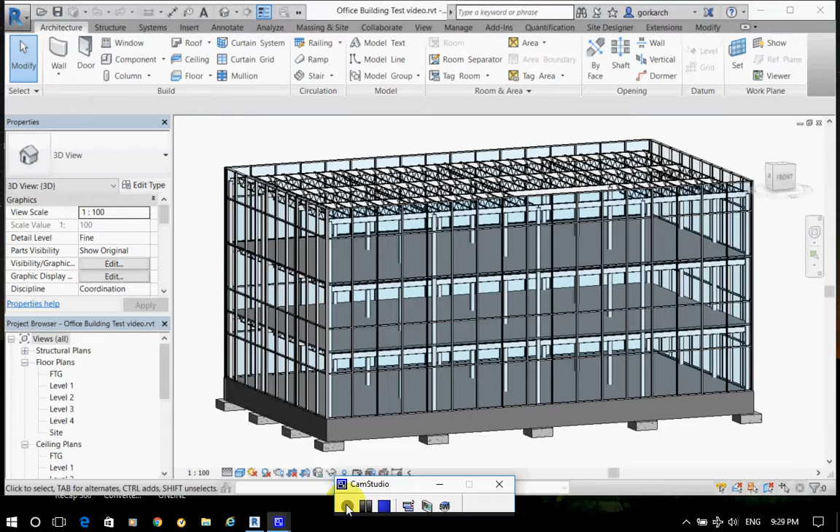Okay, so what we're going to do is an additional exit in the corner, and we have to create the roof plus some partitions inside. First thing I'm going to do is create two additional datums, horizontal datums.

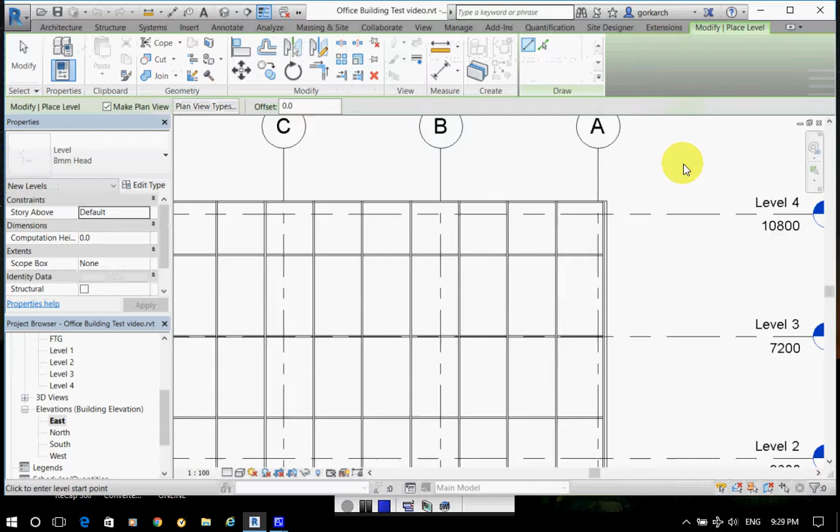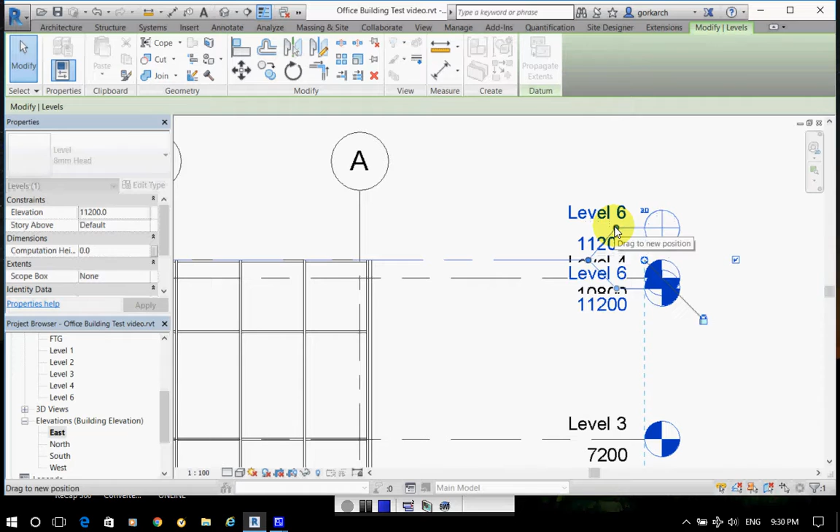I'll go to one of the elevations and create a datum with a floor plan view, level, snap on the top, escape. I'd like to make sure that 3D extents correspond in that scale. I'd like to break it and pull it apart so I can read the text. Rename it to parapet.

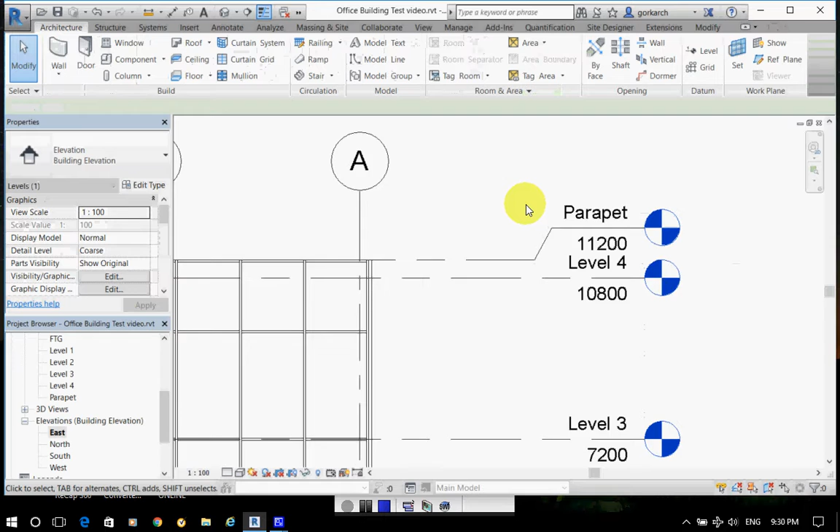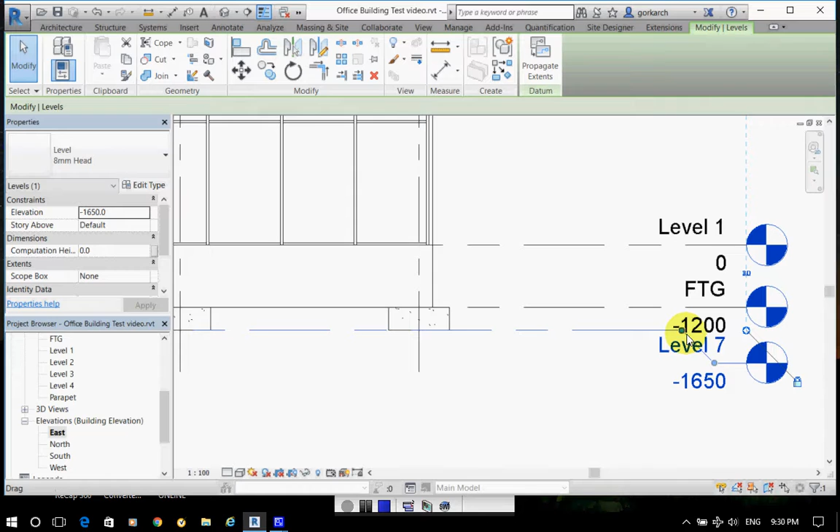Second datum, just for reference, will be underside of footings. This one I'll create differently, I'll copy it, escape. Rename it underside footings. As you can see, this one does not have a corresponding floor plan view.

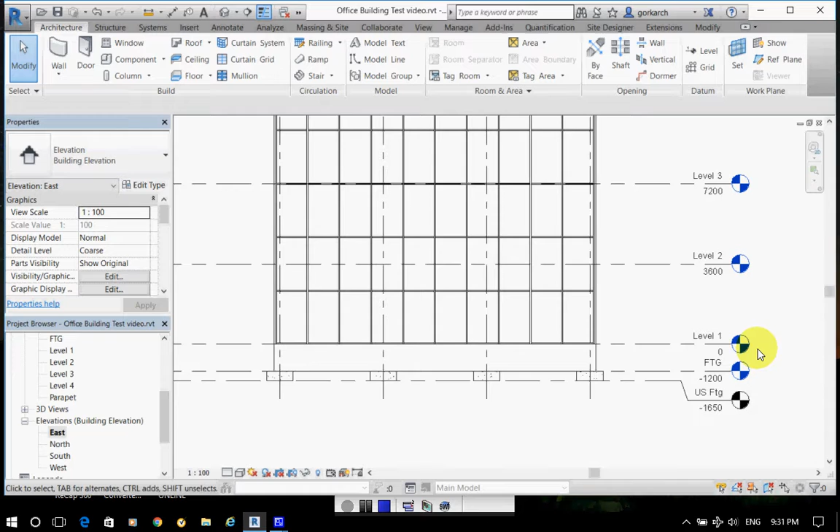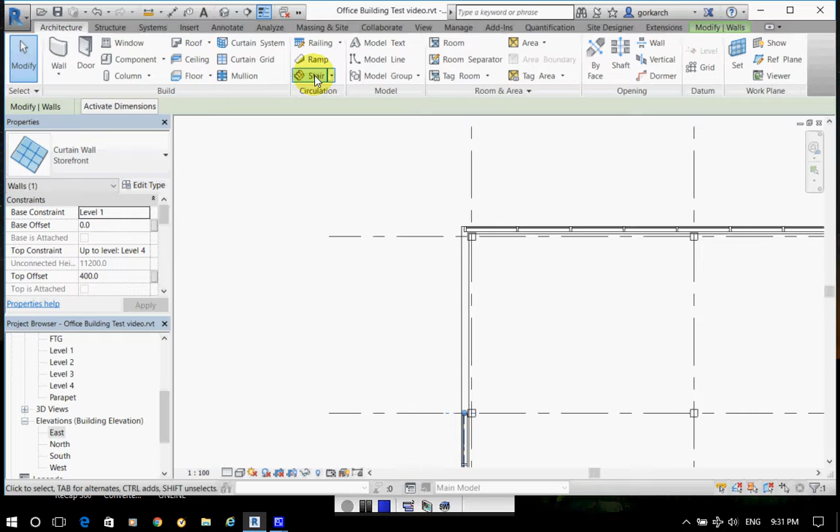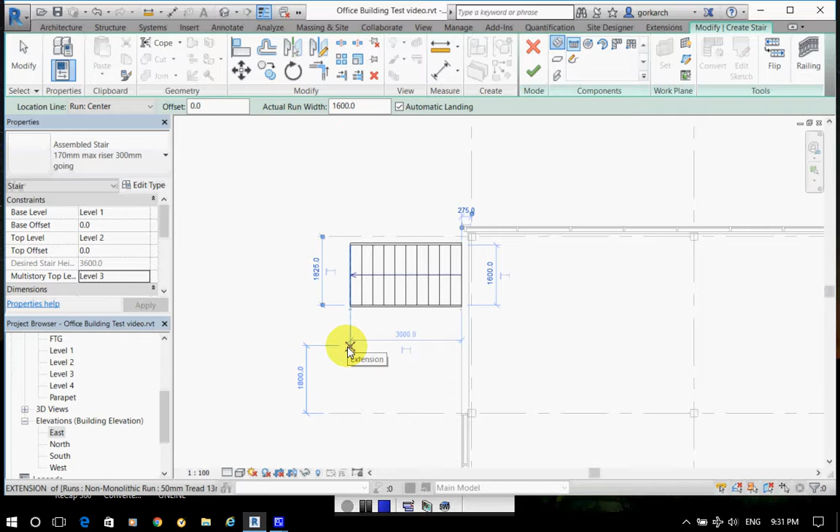1 created, landing, 2 created, finish.

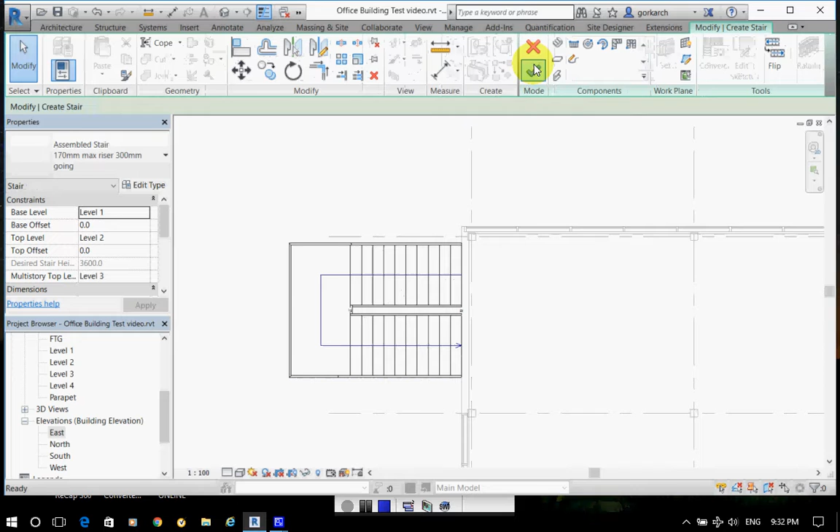I'll take away this railing, I don't need it here, delete, and I'd like to make that landing wider. Select stairs again, edit stairs, select landing only, and I'll make it approximately 2 meters.

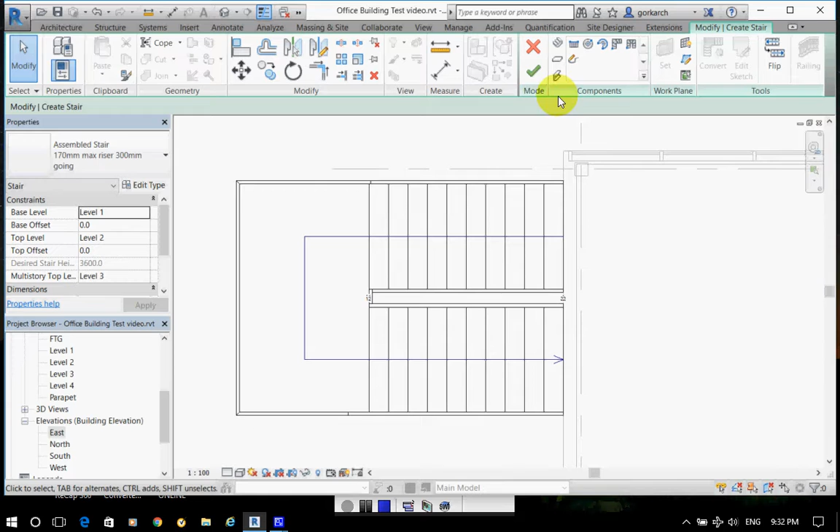I'm also going to select my handrail and flip it so it coincides with my stair stringers. I'd like to edit the path and stretch it into the landing.

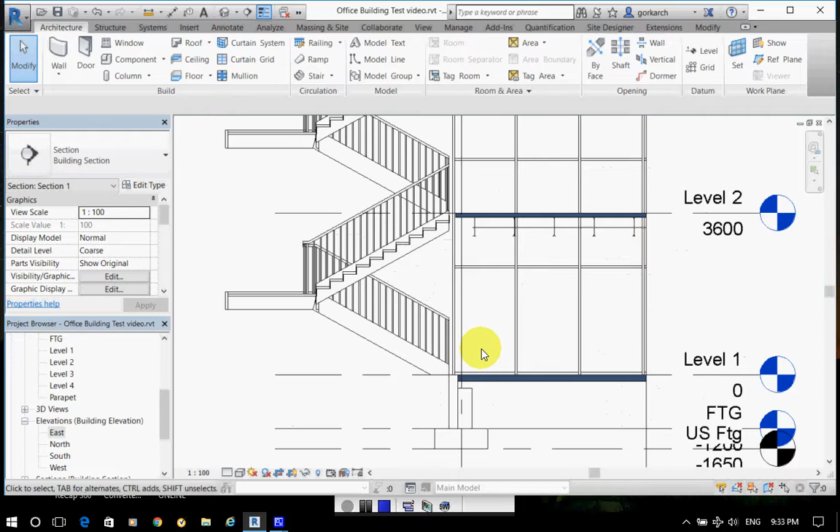I'd like to review it in a section, so I'll create a section view, escape, and in that section view I can clearly see the condition of the exit, the railing, and the size of the landing.

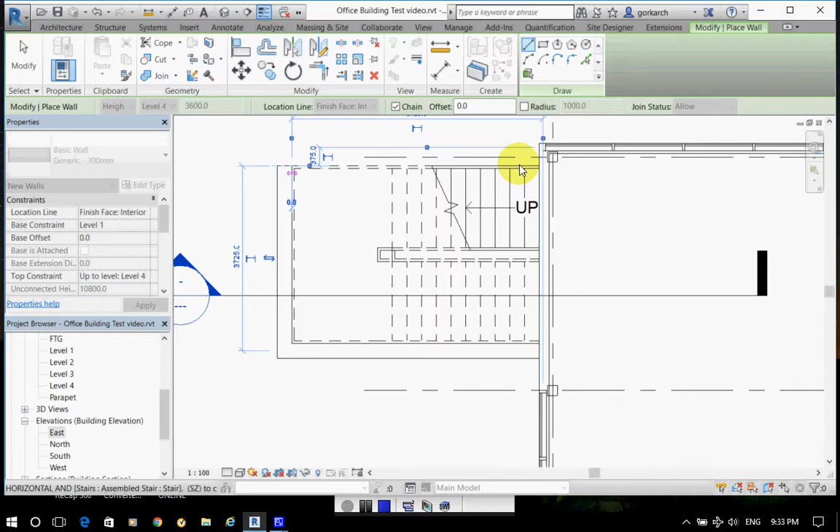Back to level 1, I need enclosure, so wall. Select the wall type that you need, and here's how I'm going to do it: height all the way to level 4, location line, finish face interior, and I'll just wrap this staircase in my enclosing wall. Escape.

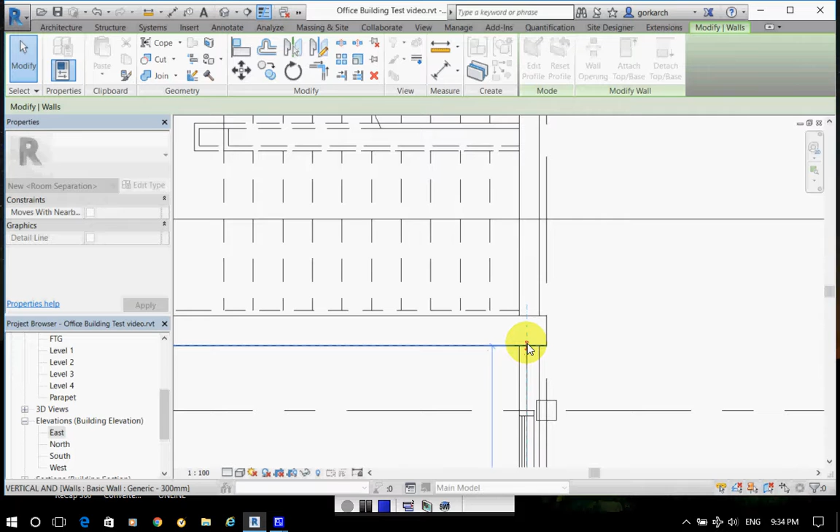To prevent elements from getting into the building, obviously you have to make sure there's no gap here, so stretch the wall all the way to the grid line, select your curtain wall, attach it to the face of the enclosing wall.

Here we'll do something else. Stretch it so it touches the face of the column. You don't have to be precise for now, we'll handle that detail later, but at least we have some kind of reassurance that there's no gap.

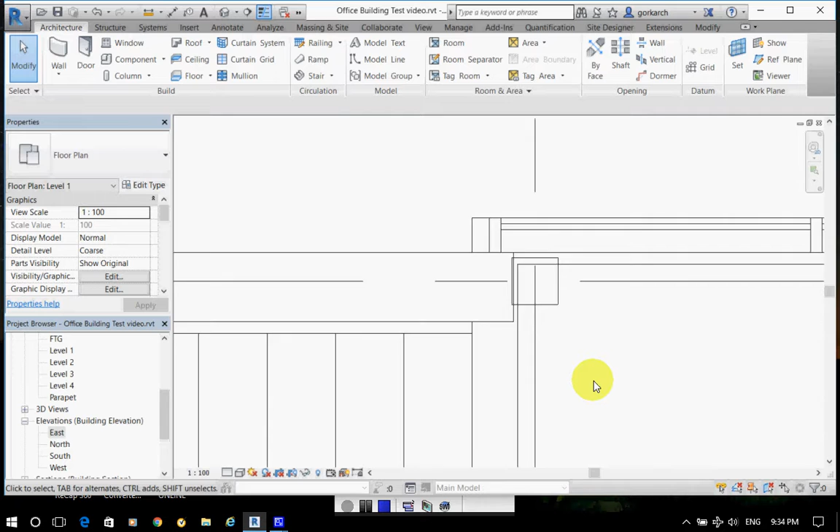Now let's do the roof structure on top. Here's how I'm going to do it. It would be my favorite, roof by extrusion.

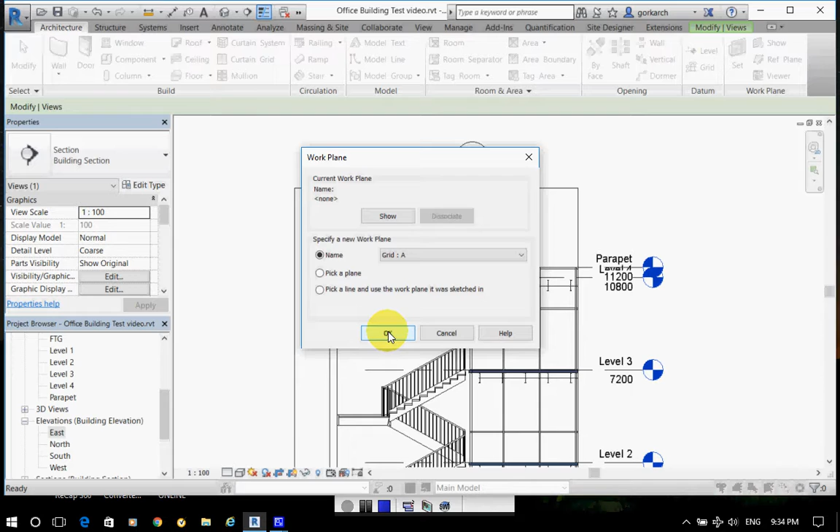I will probably set myself to draw the profile on grid line A, and that would be driven by level 4. I'm ready to sketch my profile. Center of my profile arc will be on grid line 1 intersecting level 2.

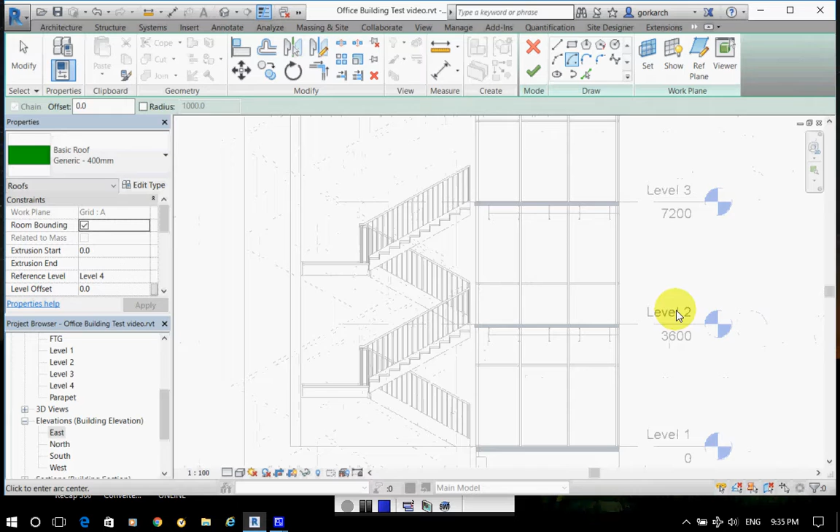If I can only find it. Here we go, first click. Let's make sure that the radius is 8 meters. Overhang - see, I didn't do myself an RP, reference plane. Let's make it a 16-inch offset, so 400 millimeters.

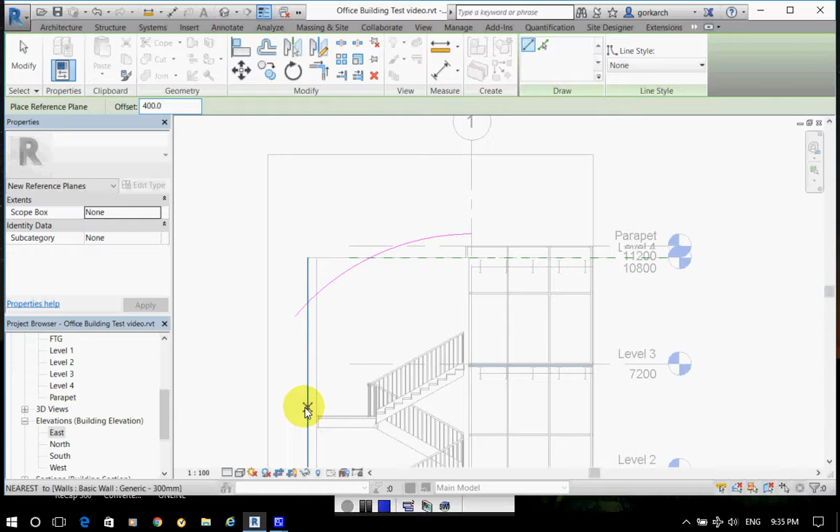Now I'm going to be exact. And finish. Review this condition in 3D.

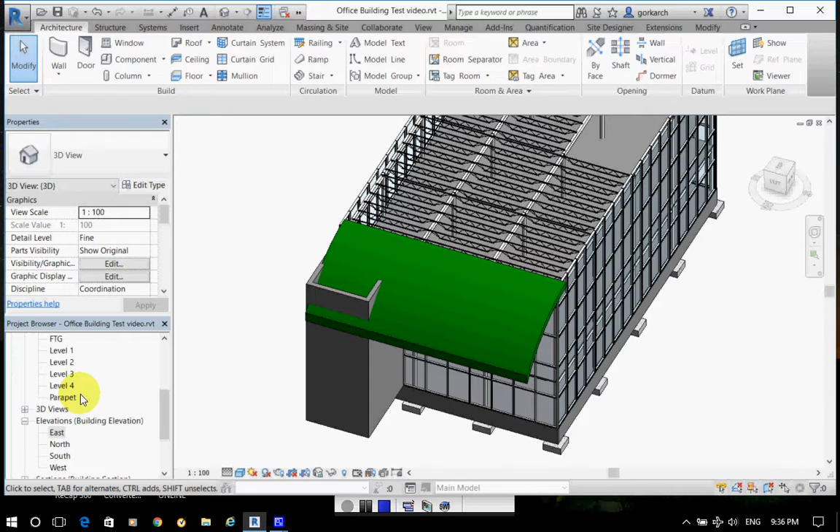If you want exact overhangs on all sides, I would suggest you go to the parapet level or the highest level. Not much to see, maybe level 4. Sorry, this is ceiling plan, not good - level 4 floor plan.

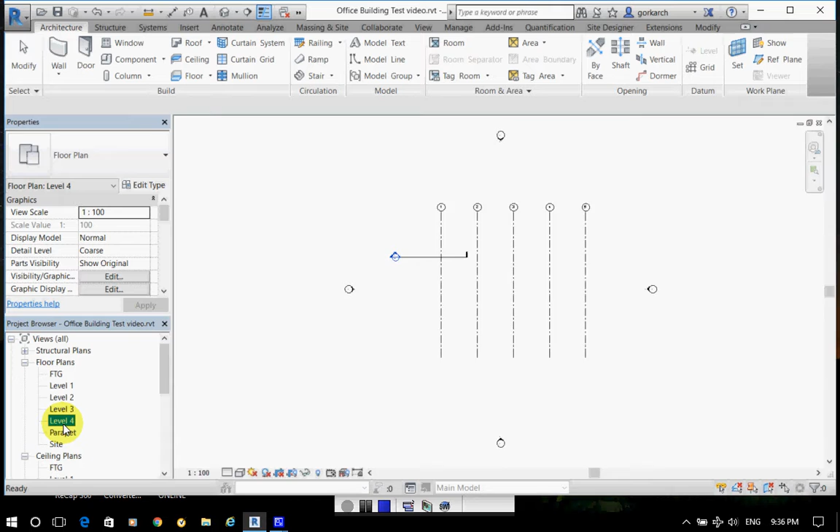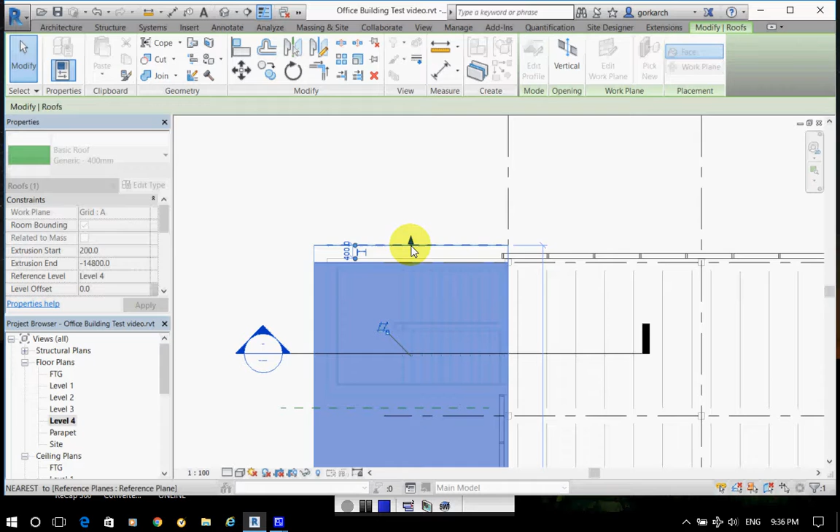Create yourself an RP with the same 400 overhang on the north elevation and on the south elevation, and then stretch your extruded roof accordingly. There we go. Review condition in 3D.

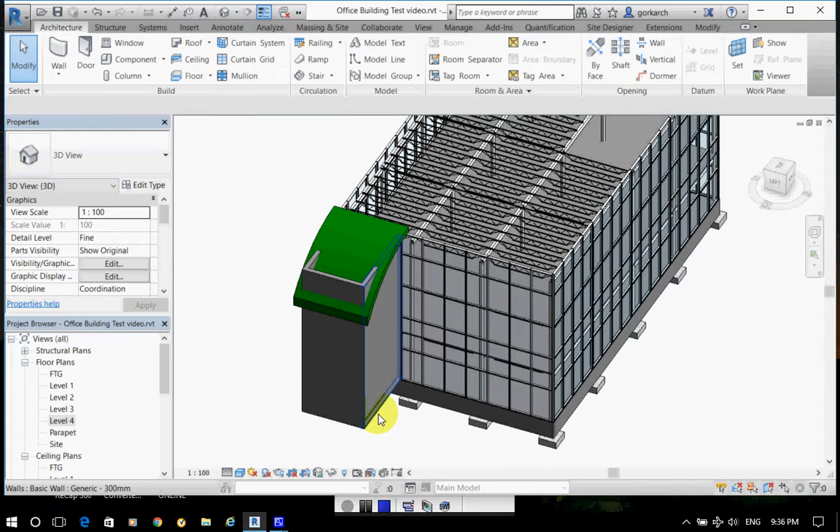Yes, we need to make sure those enclosing walls - now, can I tab? Yes, so select using tab all of them. Attach top base to the roof.

That's much faster. Let's create the foundation wall. We need a foundation wall here, so I'll go to footing level.

On that footing level, make sure that you have display of whatever is above your head. So if you can't see it, look for underlay and make sure that this underlay is displaying the level above.

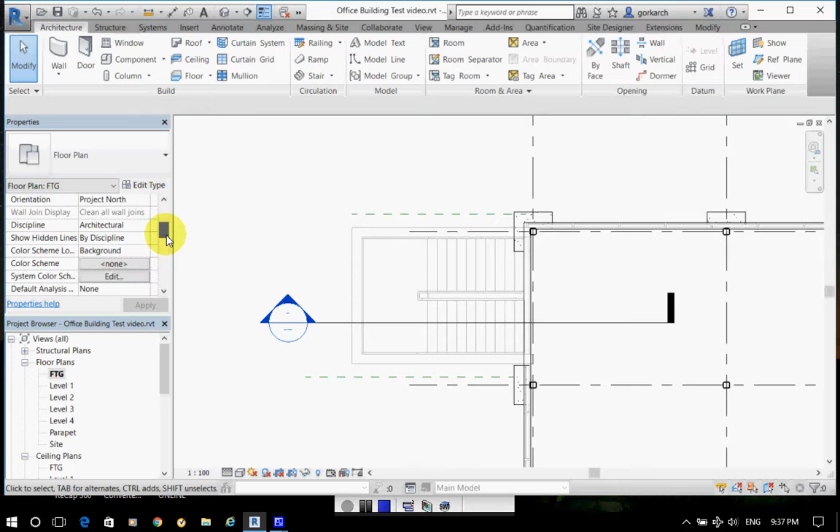Underlay level 1. Go to select wall, and I'll use this parameter here, height from level 1, finish face interior. Up - sorry, this was height from footing to level 1.

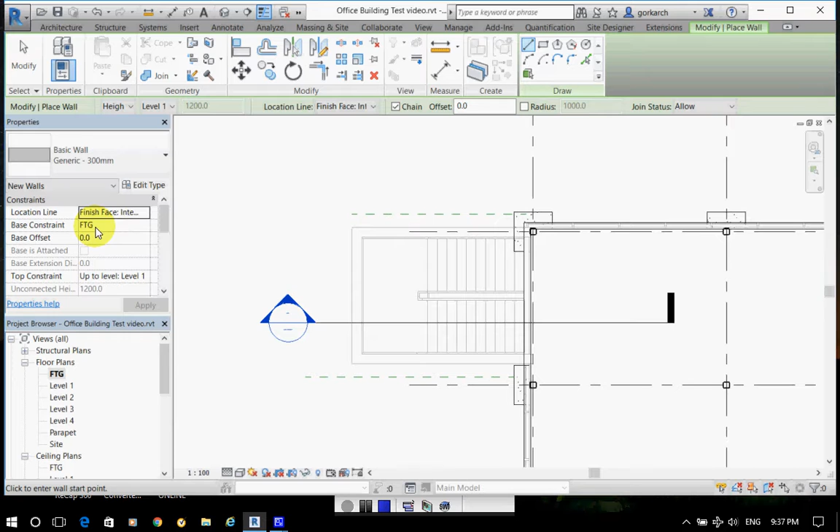I'm just going to trace that wall from here all the way around. Escape, escape.

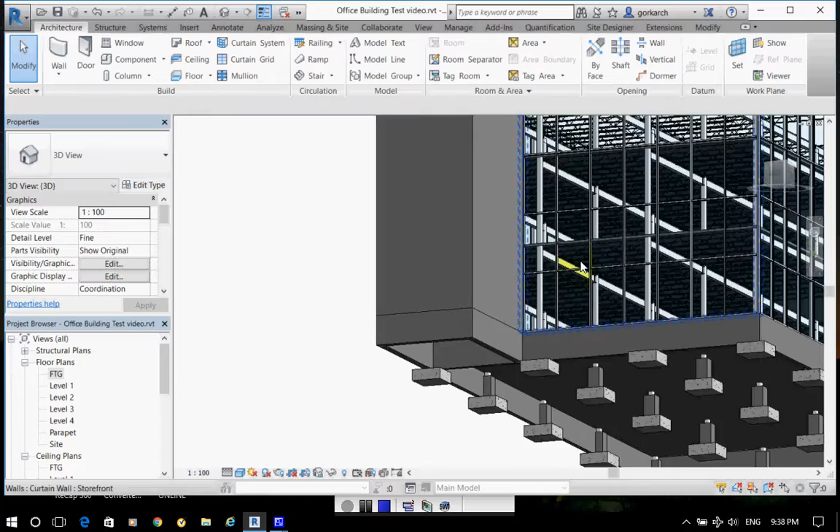Again, check it out in 3D. Not a bad idea always to look in 3D - if you made any mistakes, you'll see it right away.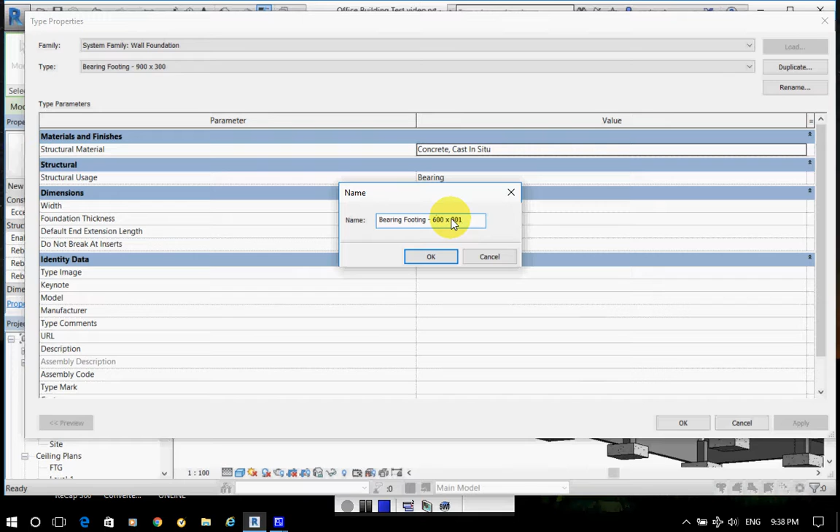Next thing, I need strip footing to support the structure. So under the structural tab, select wall footings, and if you don't have the size you need, you have to edit the type, make a duplicate, and name it correctly. In this case I need, let's say, 600 by 250. Now I'm going to change the real size of it, so 600 by 250.

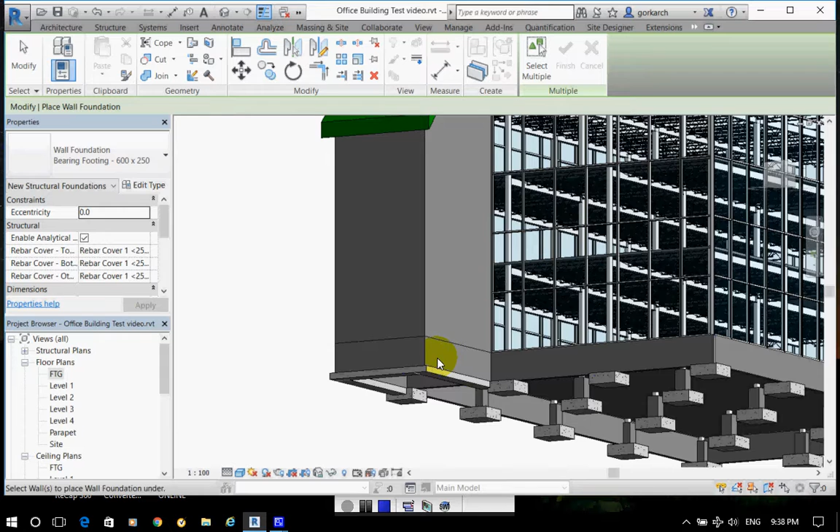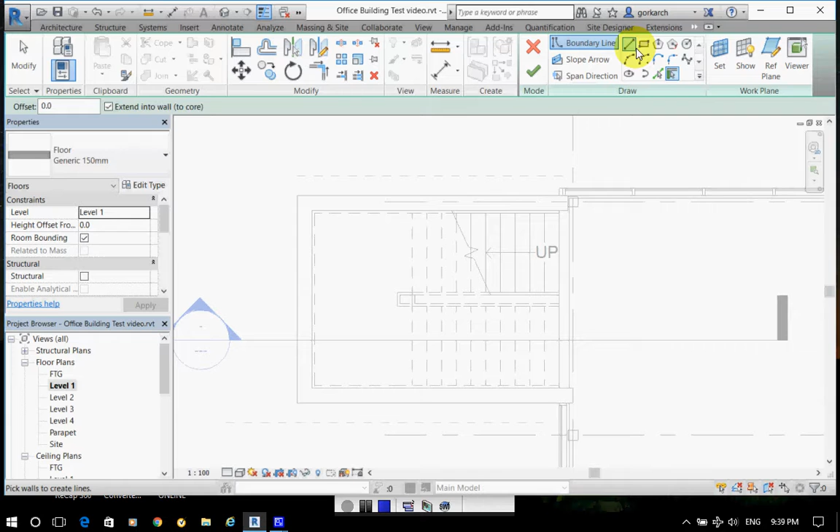OK, done. So you have your strip footing here. Don't forget a small piece of slab here, so let's go to level 1, architecture, floor, generic 150, that's fine, rectangular shape, and you need to close this area with concrete slab on grade. Finish - answer no, because you don't want those walls to hook up to the slab. Check it in section view. Yeah, pretty much this is what you need.

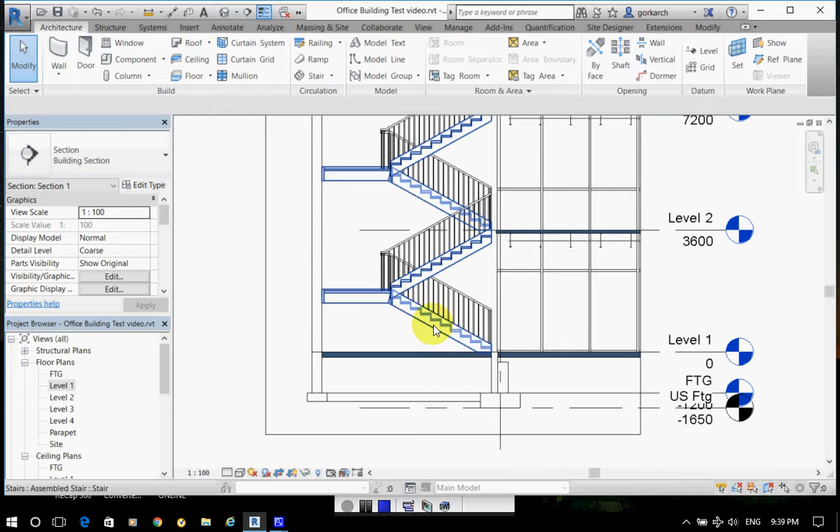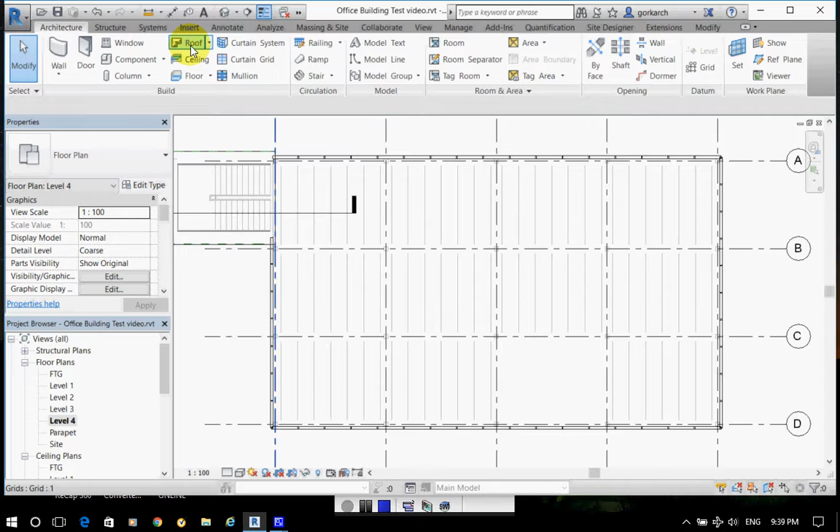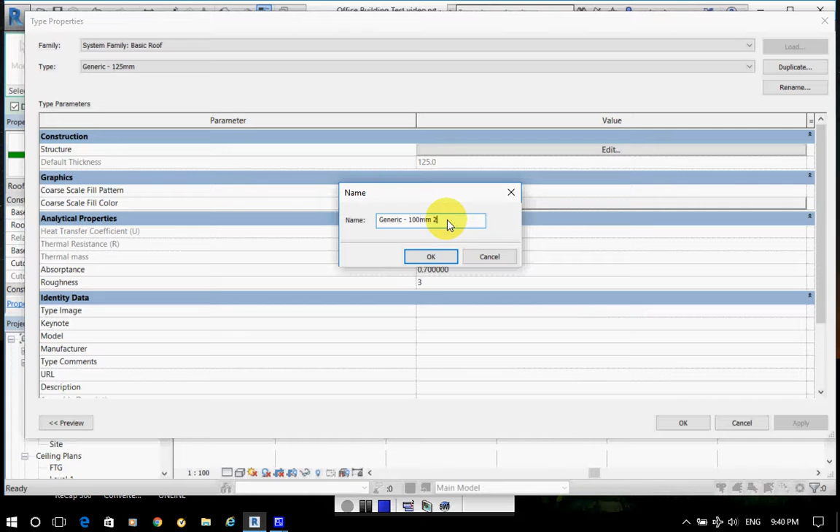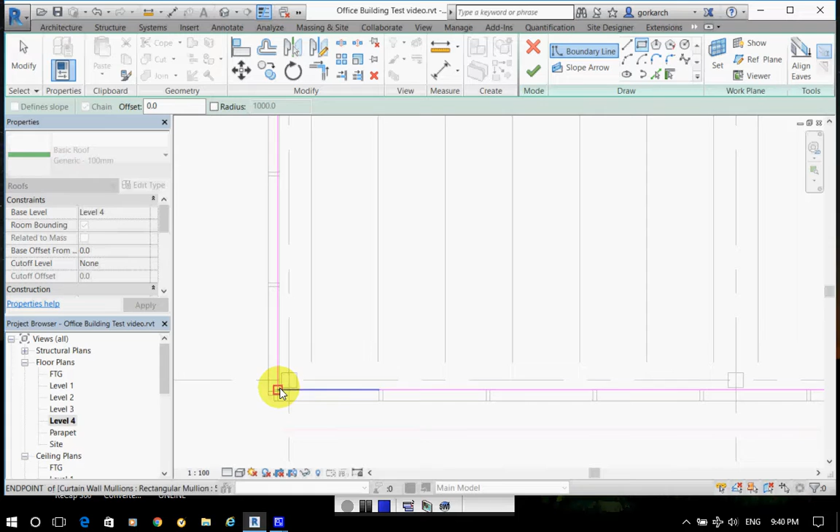Now let's handle the flat roof on the top of the main building. Here's probably a cool way to do it. Go to level 4, roof, this is roof by footprint, and select 100 thick. We don't have 100 thick roof, so I'll have to edit type, make a duplicate, call it 100mm roof, and change the thickness of it to 100. Sketch a rectangular shape, no definition of slope because this is your flat roof. Snap to the inside face of your curtain wall, and finish. And again check it in 3D.

So now that we have it, as a bonus you can do a parapet wall. That would be something that uses the sweep function all the way around those curtain walls here. Here's how I would suggest we do it.

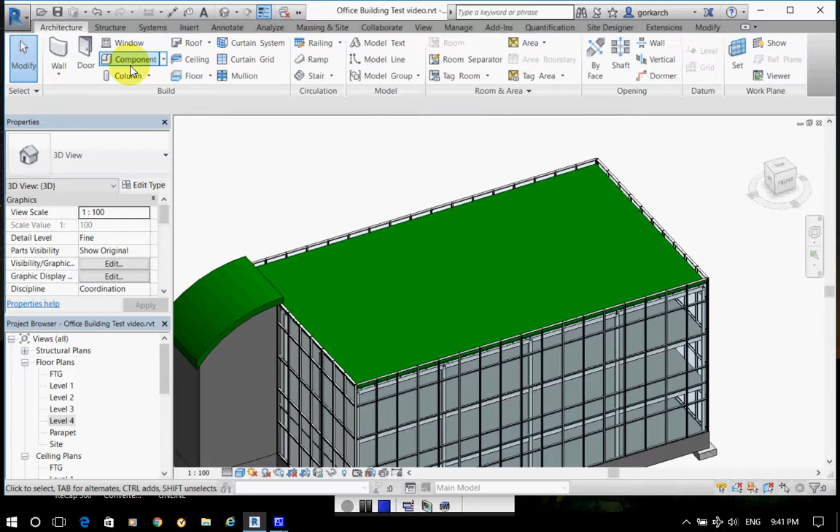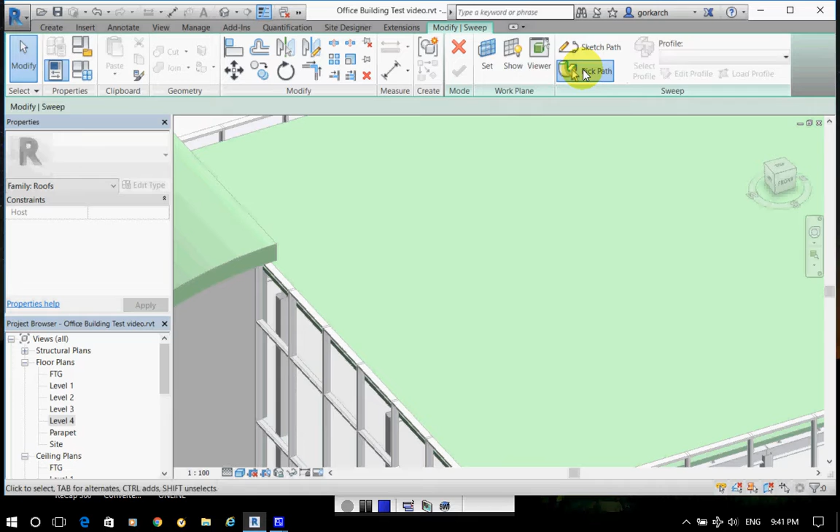Architecture, component, model in place, schedule this as a roof, name it, let's say, parapet, and this will be a sweep. So I'll select the inside face of my aluminum profile, pick path, 1, 2, just be precise, make sure it's the top inside edge of this aluminum profile.

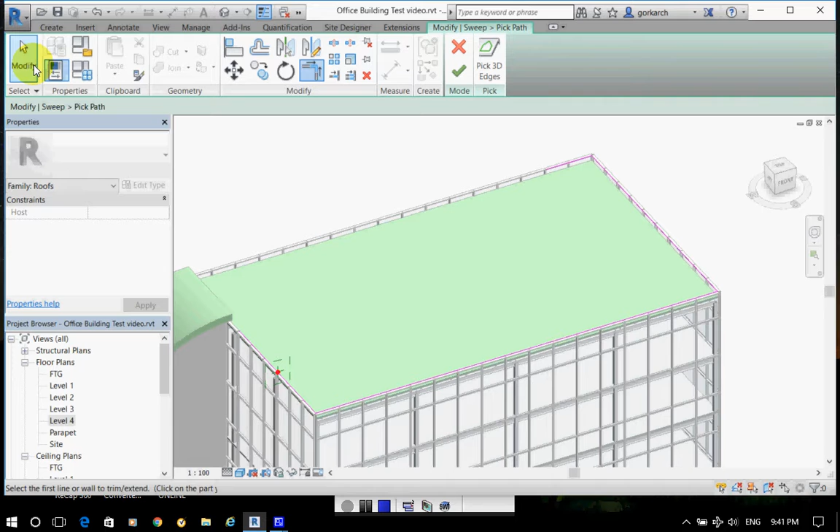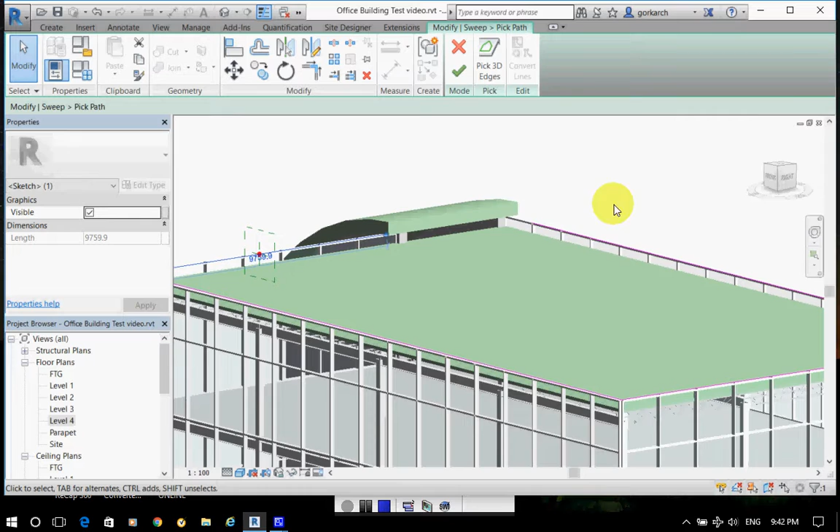Now you have to trim, and make sure you're stretching it, extending it, because you want to make sure that this whole thing travels throughout the entire portion of the roof. So all the way from here, we're covered here. I think we're missing one section here. There we go. So this is your path.

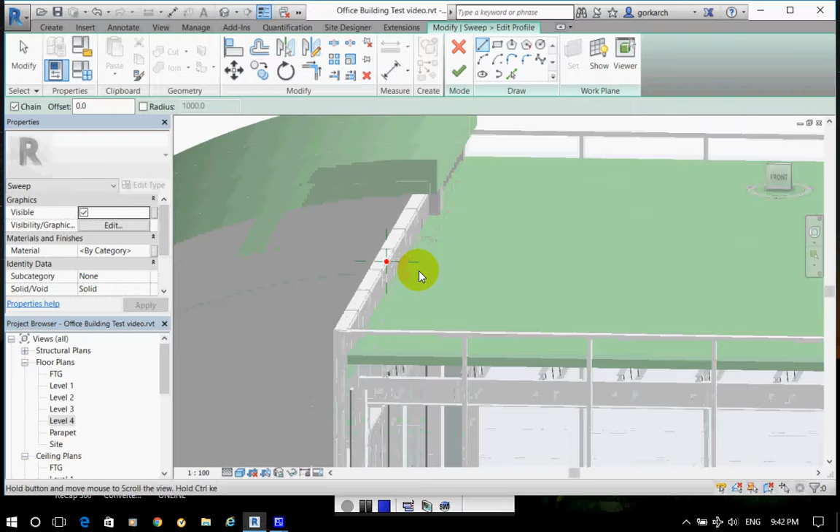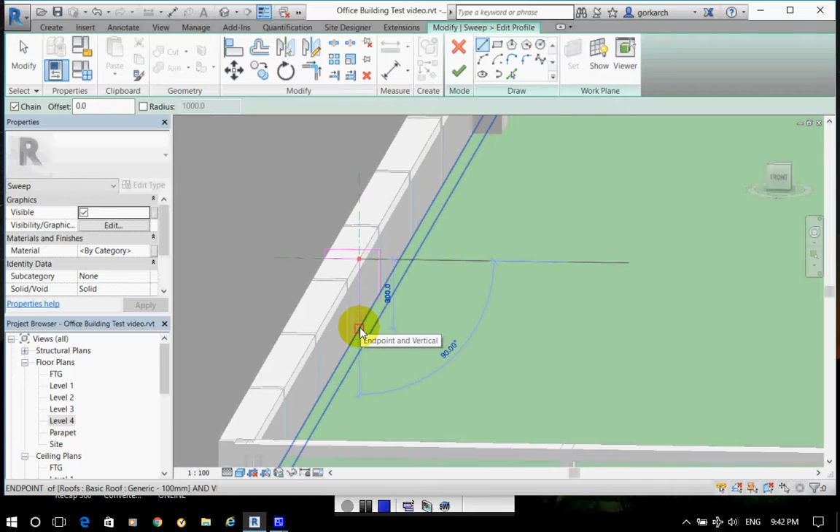Now we have to handle the profile. For the profile, I suggest we just do a simple flashing like this, 40 thick, extend it to behind, escape, that basically touches my flat roof, and I'll do a tapered portion here to make sure the water gets away from that detail. Make sure that profile is closed, finish it, finish it.

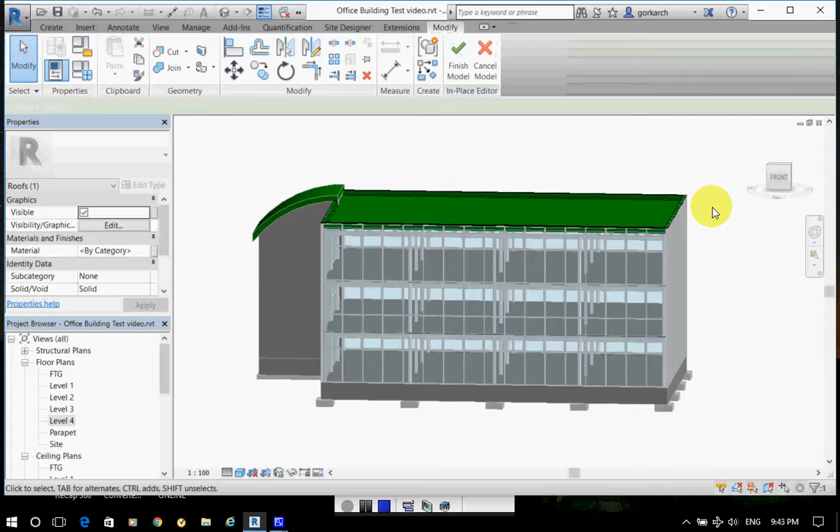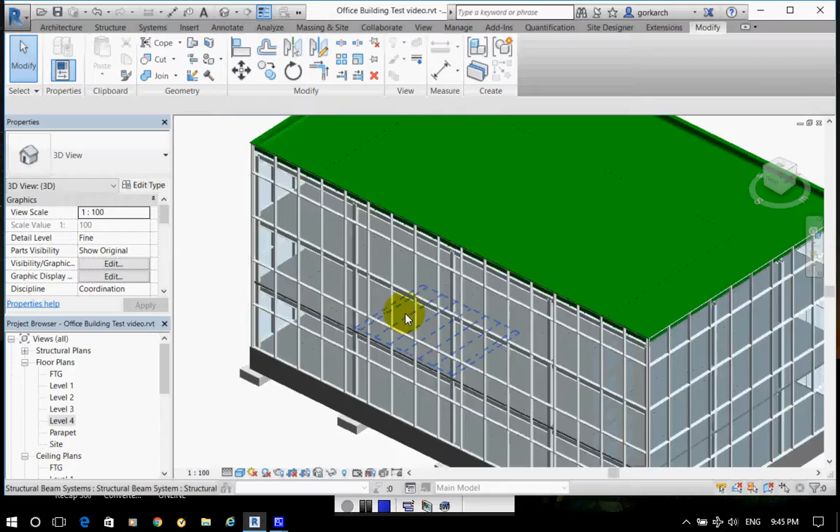So here's the beginning of your Revit model that would be suitable for details. If you're happy with the shape, make sure you finish that model. So this profile is finished, the sweep is actually finished, and let's get inside of that building.

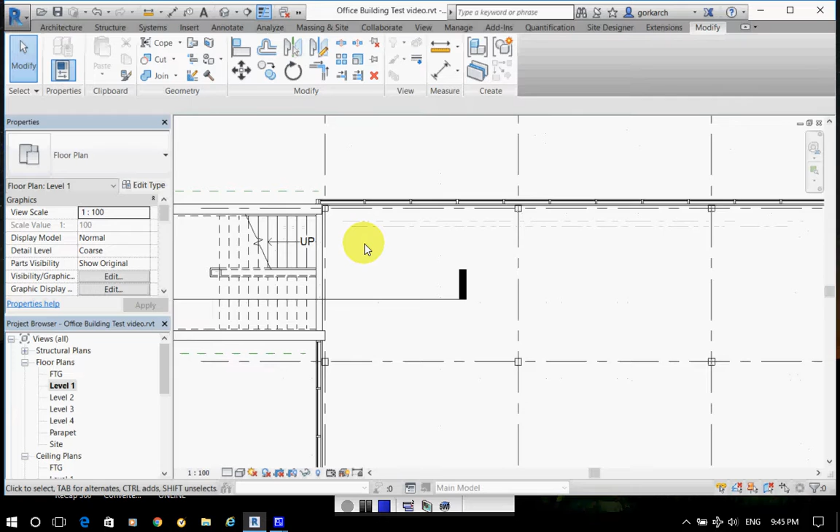So on level 1, I'd like to make sure that I have some partitions, some office partitions. This will be my exit, so I'll need some vestibule rated. I need some entrance vestibule. Let's make sure that this is close to what the code will require.

So let's create, inside of that building, let's create a wall. Select the type of wall that you need. I'll select interior 135 2-hour. And on purpose I'm not going to touch it, because I don't want those walls to be attached to each other or joined. It would be from level 1 to level 2, and I'll use wall center line.

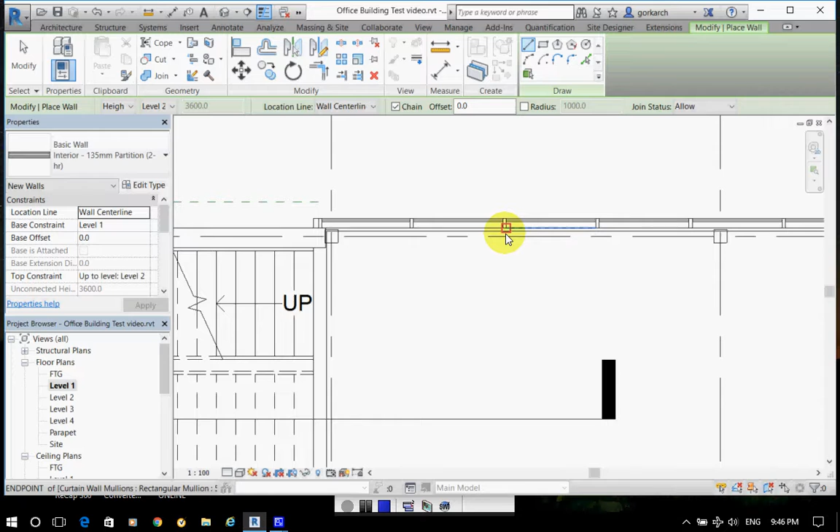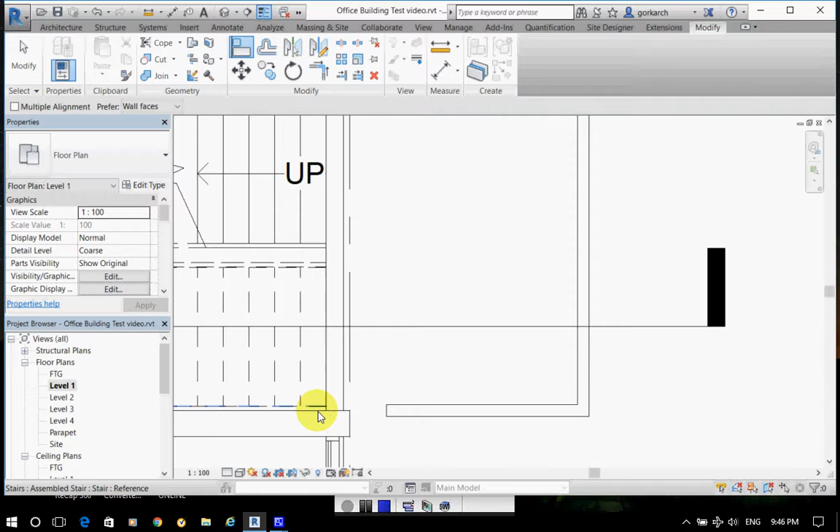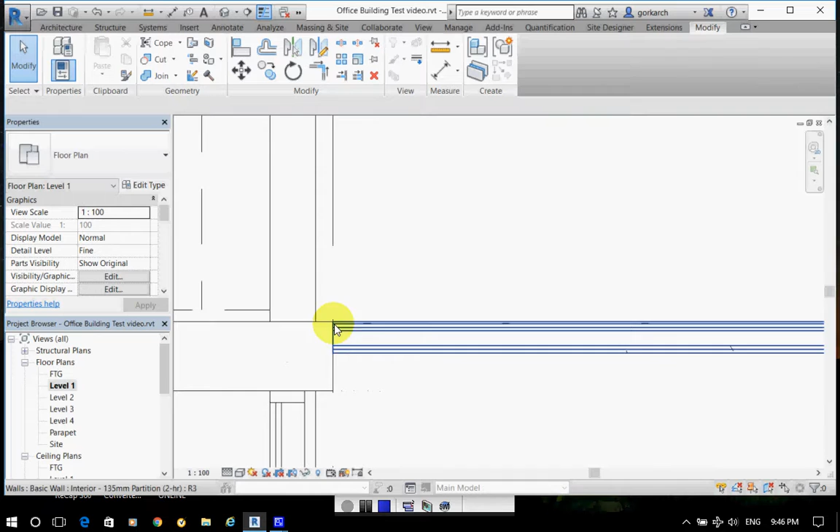I'll create this wall from the mullion, something like this. I'll click the wall here, right click on the grip, disallow join. I'll make this wall aligned with the face of my enclosure. I'll select this one, I will also disallow join. Therefore you're obtaining a detail that looks like a real connection. So if it's in a proper scale, let's say 1 to 50, proper level of detail, you don't see drywall merging with a concrete block, for example - it's a different connection type.

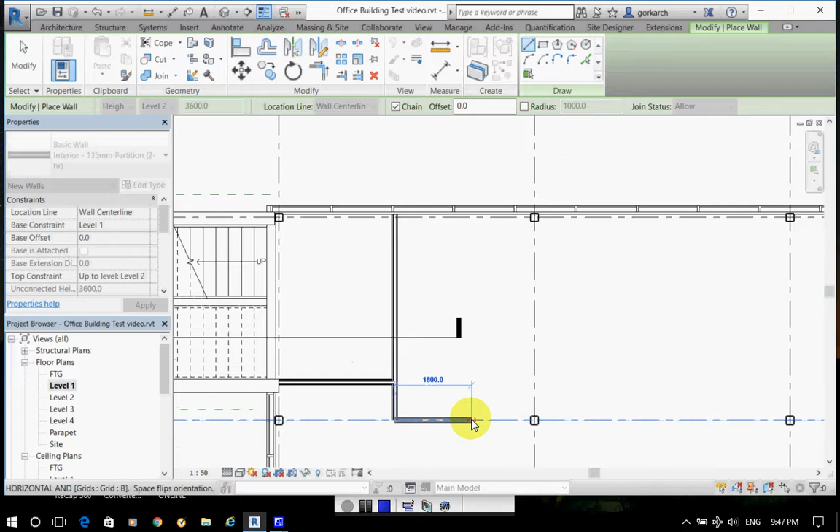So here's my stair vestibule. Now I'm going to create my entrance vestibule, so that would be another partition. Wall. I'll go on the grid line, select column, restart on the other side, and restart on this side.

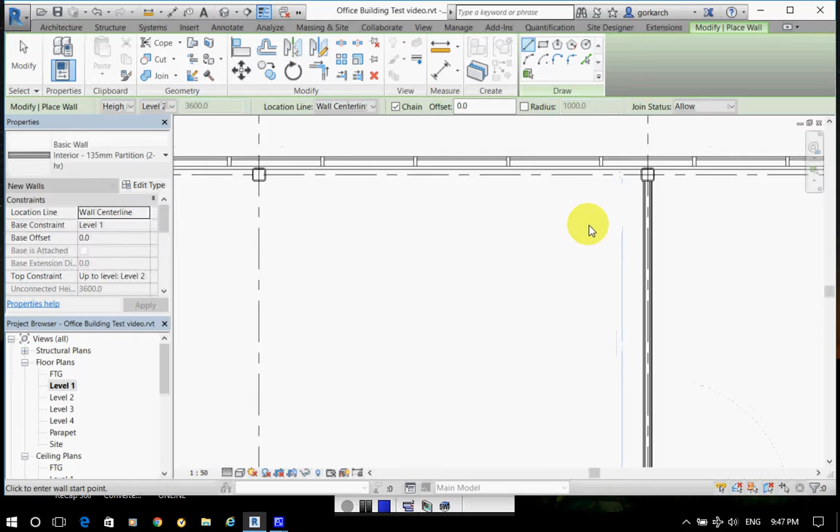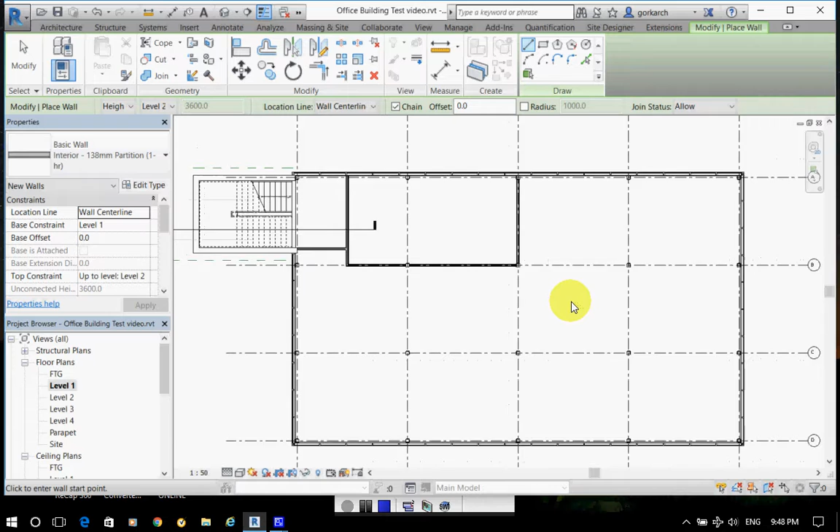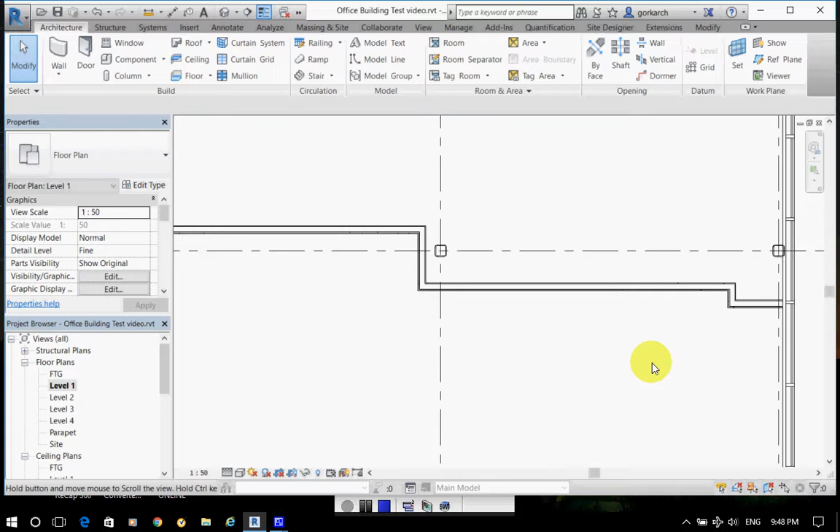So that would be my entrance vestibule to the building, and I would like to create some reception area and private offices and some miscellaneous areas. Since we really don't have time to do the function, I'll select just a regular 1 hour partition. I'll create basically a layout that looks like this. And then close this area here. I will also create some open office concept, so for this it will be handy to use room separators.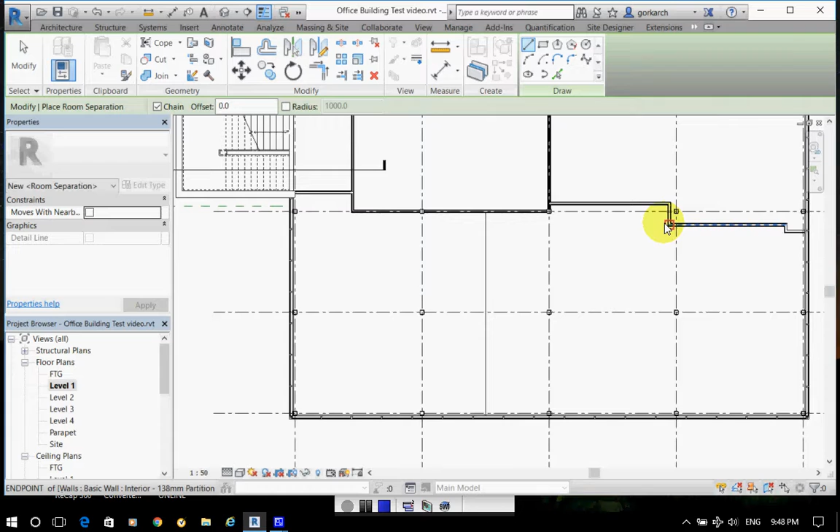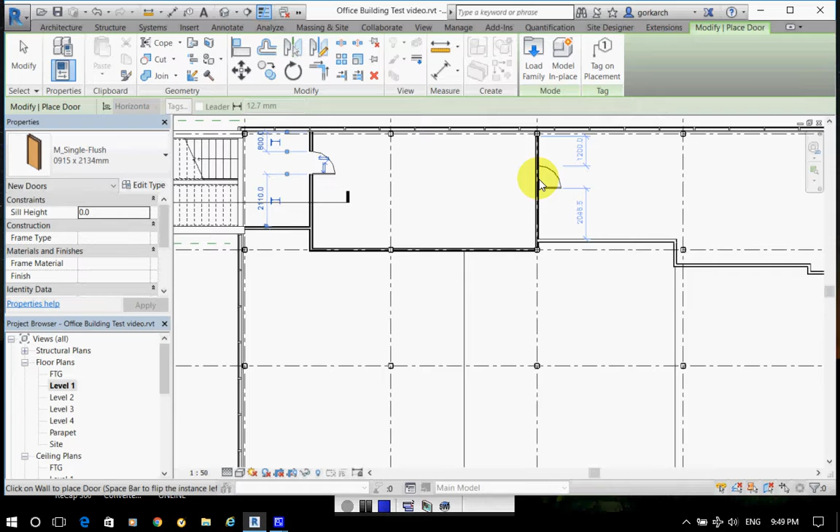For example, I'll need one office area here, and I'll need another office area here, so then it's treated separately. Doors - one here, one here, and then let's say 2 sets of doors here and here. I would also need an exit door through the curtain wall.

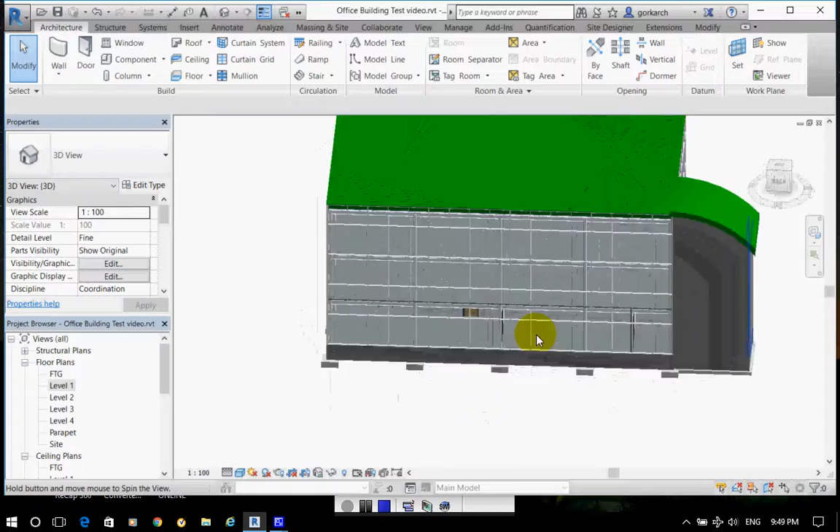Now this would be a different story, it's done differently - I'll do it in 3D actually. Here's what you can do: select one of the panels, use tab to select, unpin it, edit type.

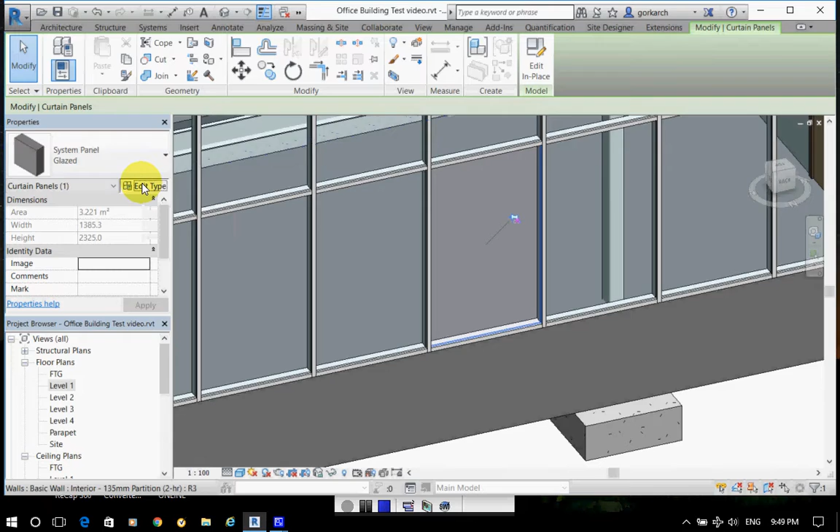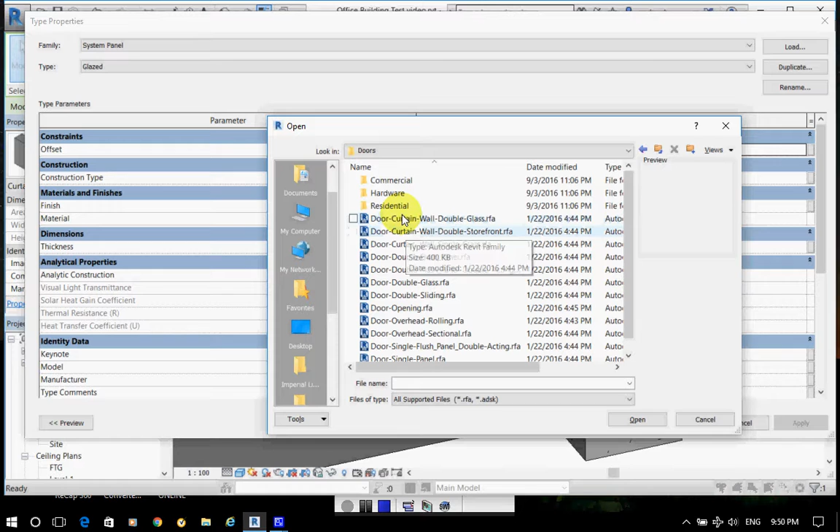And if you don't have a system door, you have to load it. Go to doors, and I'll select this one - single door curtain. So then that panel is actually replaced by the door system. If you look at the plan view, it actually creates a door swing for you on the plan.